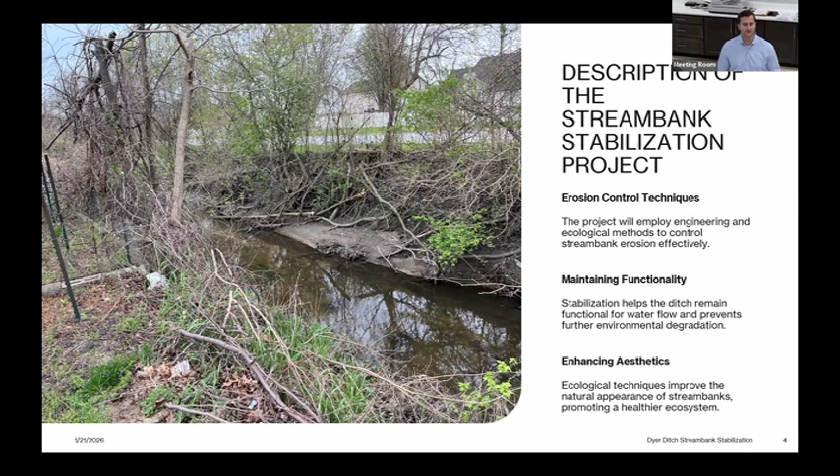So erosion control techniques popping up there, a mix of hard armor and ecological streambank erosion measures. Stabilization helps further help water flow, prevents further environmental degradation, such as these vertical banks where all the sediment sloughs into the stream and gets washed downstream, as well as making it pretty for the local residents and people who utilize the area.

Key outcomes, as I keep saying, erosion reduction, infrastructure. There is a roadway just on the backside of this photo, St. John Road, in the town of Schererville, where the erosion gets pretty close to the road. It's not going to impact it anytime soon, but without taking action, one day it will have potential impact on that roadway as it is within the fluvial erosion hazard area.

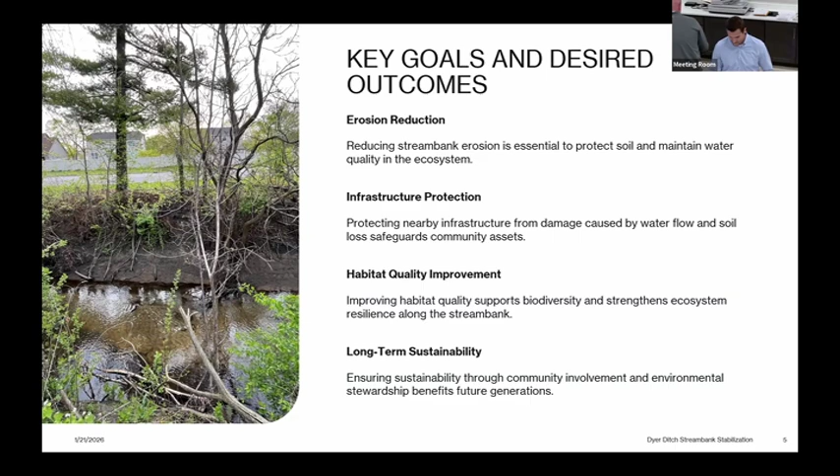So some challenges, as I said, the need for stabilization, loss of riparian area, threats to aquatic life, as well as that sedimentation.

About 20 years ago, when this area was developed from agricultural land, subdivisions went in on both sides, Hurtstone, Auburn Meadow I believe, and a third one I forget the name. There was some bank stabilization done by the developer with filter fabric and riprap, which has since, as you can see, been washed out with vertical banks. Some remnants of that filter fabric are left. That was around 2003 to 2008, in that general window when this area was all developed.

A lot of buckthorn and invasive species all through here.

As I said, there's homes, rear yards on the Dyer side, as well as two buried petroleum pipelines that are parallel to the ditch. We want to make sure we keep that protected and erosion is not encroaching into those pipelines.

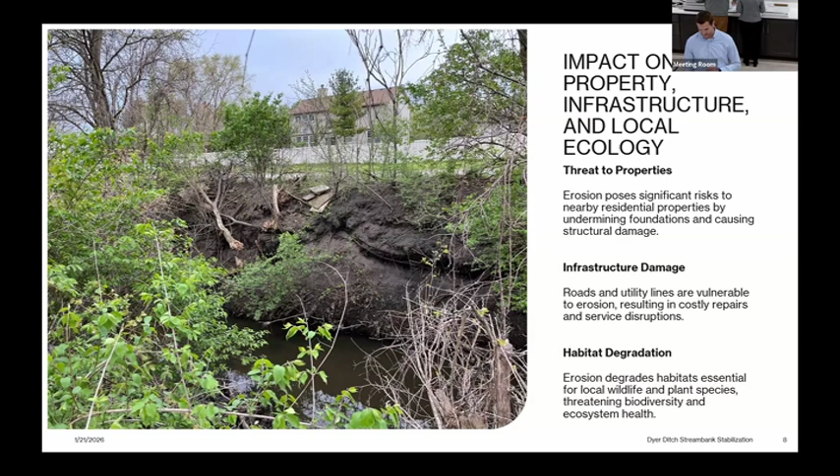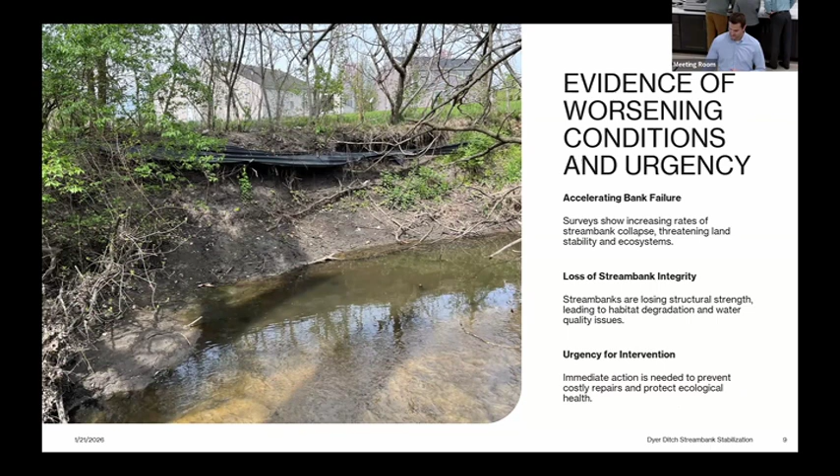I've been out here a few times the past couple of years, and it's definitely been getting worse year after year. So there is definitely an urgency for intervention in the near future, as the bank failure has been accelerating.

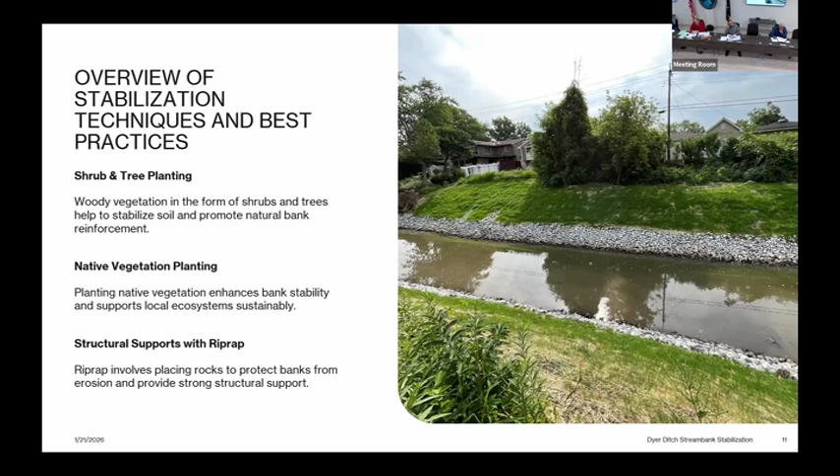Proposed solutions: shrub and tree planting, native vegetation plantings on the side slope, as well as structural support of riprap at the bottom few feet.

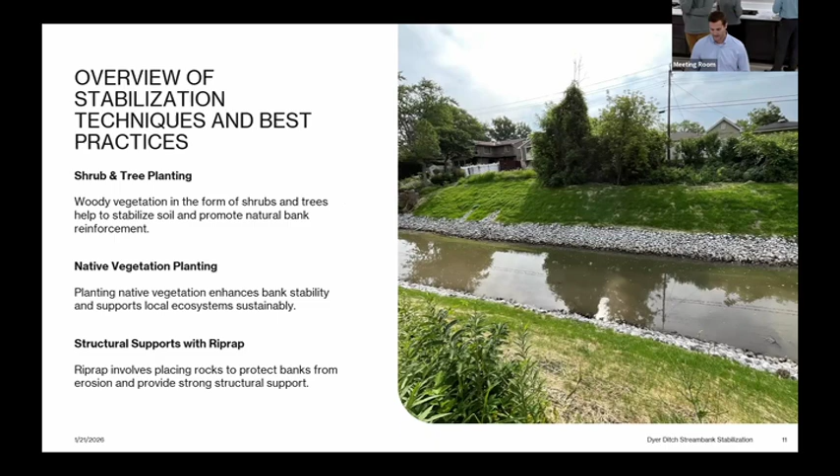This is a photo of some of the work we've done on Hart Ditch in the town of Munster, and it's been turning out great. This is about 6 months after the work was done there. You get the 2-to-1, 2 horizontal to 1 vertical side slope, and that riprap at the bottom really holding up for those everyday storm events.

So while we're all here, funding requests and expected benefits. Our funding request is actually only for $222,350, which is 50% of the lowest total bid received. So that will be a correction on the agenda there - obviously a little better for everyone, lower funding request.

So we want that to happen - we want the weeds to come through the riprap, so that it fills the voids in the riprap. You get vegetation grown, definitely beneficial. Thank you, and that is all.

Thank you. Any questions for this young man? Yes, I have a question - well, let the guys go first. How long of a run did you say? A quarter mile? Approximately a quarter mile to half mile. I think it's about 0.3.

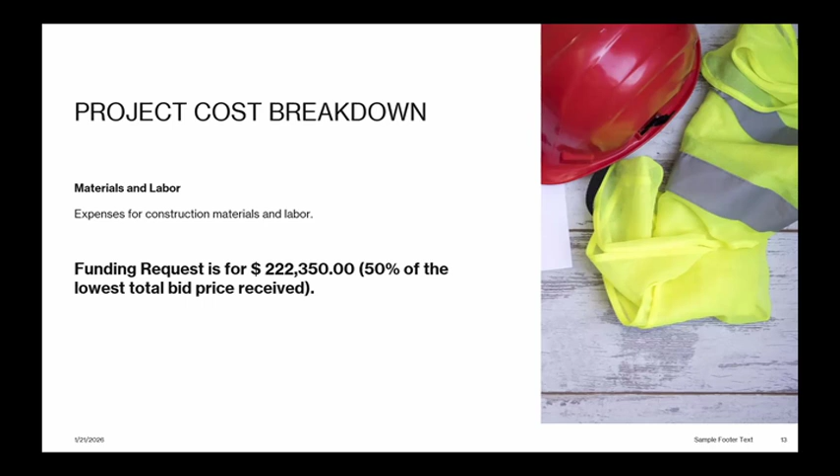Thank you. So can we make a motion to grant the $222,350 request approved tonight, subject to attorney review? Mr. Chairman, to Mr. Gozdecki's question, I guess we haven't done that in the past, and as a pattern, I think we ought to stay with what we've done to stay consistent. I don't disagree, but to stay consistent, I think we ought to wait until the next meeting. Very good - I thought we had done that one time in the past, but I could be mistaken. Any other questions? Thank you, sir.